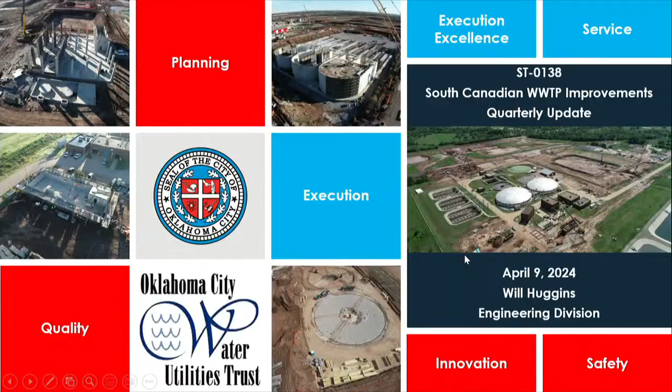Just a reminder, the existing plant is reaching the end of its useful life, so several facilities and treatment processes need to be updated. We're going to increase the treatment capacity from 6 MGD to 8.66 MGD. We're also including enhancements to the treatment so it can comply with new regulatory requirements regarding the effluent, and to optimize the plant to current standards.

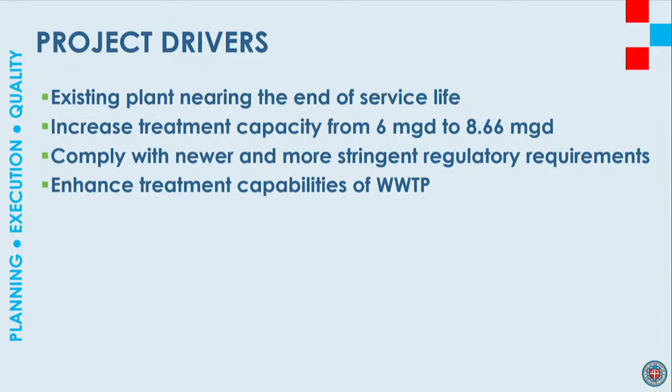Just a little background, I think you've seen this slide a couple times. The engineer is CP&Y, doing business as STV. The contractor is Crossland Heavy Contractors. Construction costs after the value engineering are around a little over $191 million.

It's a big number to get out, so it's a 54-month project, which is long. At about the 42-month mark, we should actually come on to a lot of the new treatment processes being online, the new plant, the new effluent. Then there's about a 12-month period where we're going to be demoing the old plant and restoring the site.

Right now we're tracking pretty well as of April 1st. We're about 33% spent in terms of dollars and around 37% in terms of time complete, so tracking well in terms of getting work done.

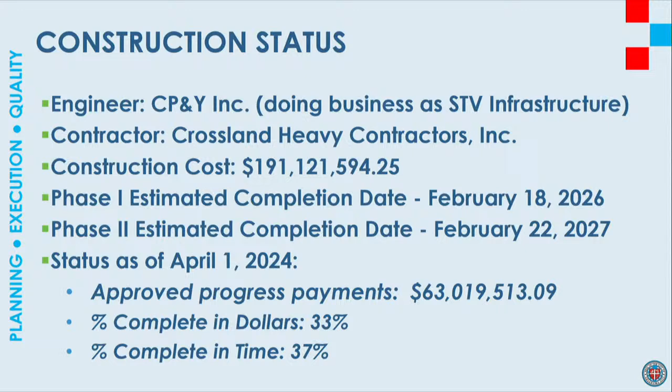Just a quick brief bullet point looking behind the last 90 days: we made a lot of headway on the aeration basin structure, a large concrete structure. I'll show you some pictures on that progress later on.

We've also started the final segment of the 54-inch effluent pipe, including installing a new headwall out in the river. We started pouring base slabs for the clarifiers, and there are several new structures that we'll give you an update on at the next quarterly meeting.

Looking ahead, we're projecting to complete the actual concrete structure for the aeration basin. We plan to do the roofing for the admin building and continue the rough-in and interior finishing. We're going to complete the outfall headwall and effluent pipe, and also do the main slabs and walls of the clarifiers.

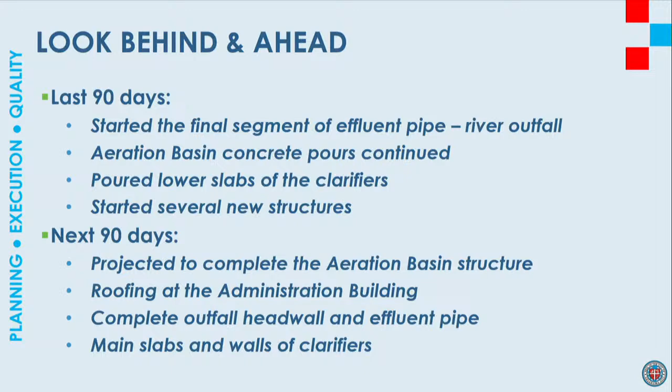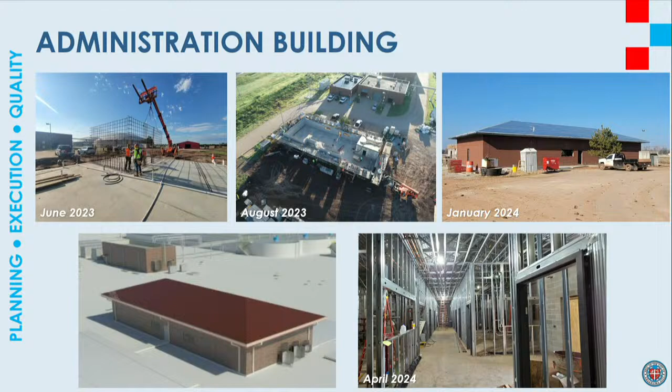With that, I'll show some pictures and try to do it in a timeline format so you can see how the project's progressed. This shows the evolution of the admin building, which will house the offices for staff, where they can meet and train, and the general controls of the actual plant. This is a headworks structure, a new influent headworks, and this just shows it progressing from August to April.

This right here is the actual influent channel. There'll be two bar screen mechanisms located here, one here, and then this is the effluent. As we progress, you'll start to see equipment being added to these pictures.

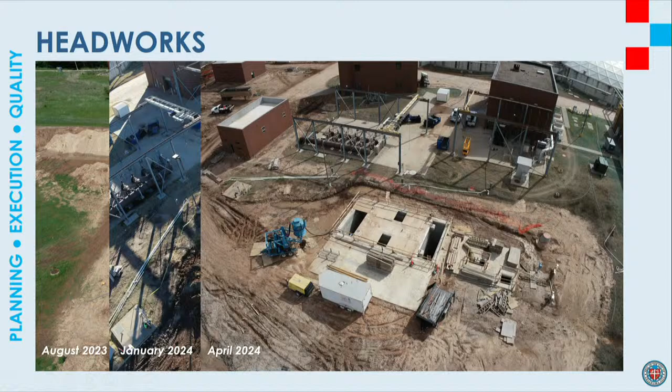Aeration basin - this one's kind of neat, you can see it's a rather large structure. If you have a chance to visit during construction, I'm happy to give you a tour. It's kind of dirty right now, but the next slide is really cool.

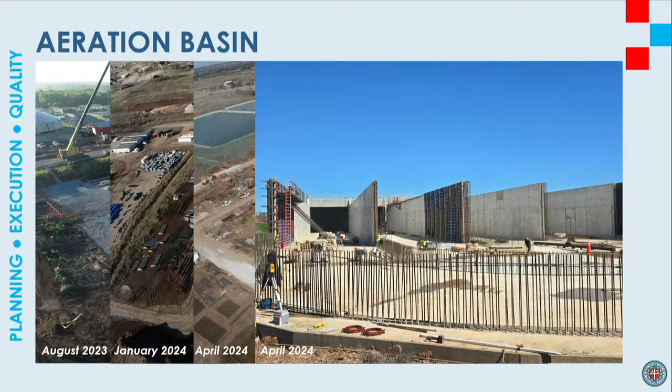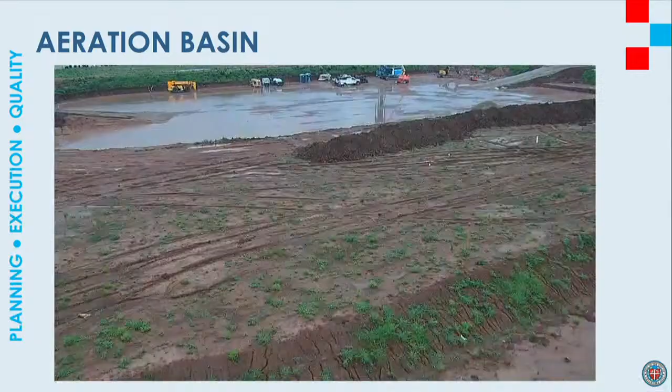Starting about now, you'll see concrete pours coming in - the floors, and they're bringing up the walls, working along. Now they've started to pour some of the decks from this end down here, starting on the upper decks, and they'll finish up the structure over the next 90 days.

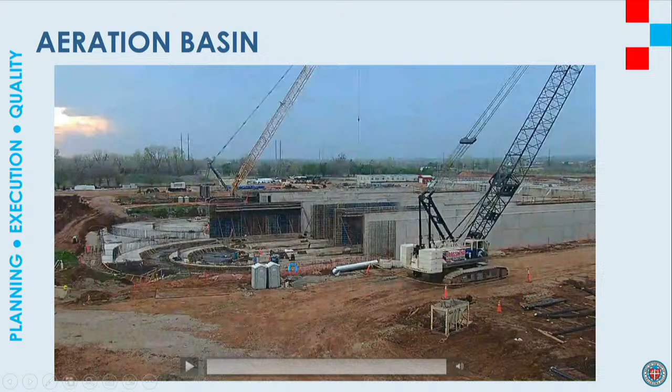Clarifiers, another treatment process. They've done the subsurface improvements, and now they're actually pouring the foundation, and they'll be coming up with the walls.

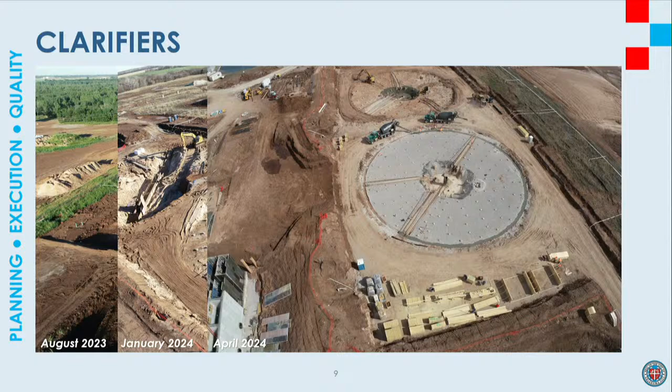Primary electrical building - it'll kind of be the electrical heart of the plant. It's a new primary electrical feed, new primary electrical distribution system, and there'll also be generators located there. They've got the building in place.

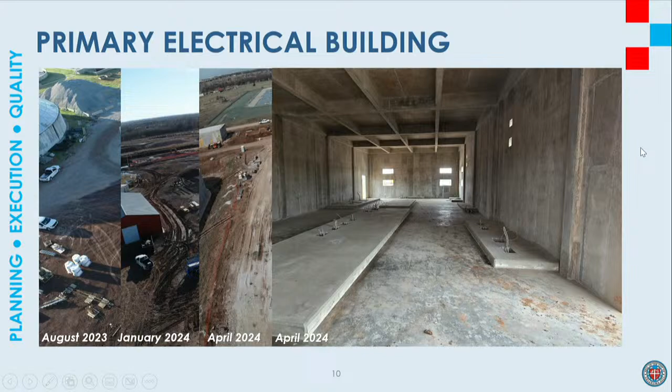Whenever the electrical gear comes in, which is a long lead item, we'll start to see some gear actually come into this building. Disinfection building - this is actually the on-site sodium hypochlorite generation system. As we've talked about before, we're moving away from on-site chlorine gas to on-site generation - a fancy way of saying bleach. So this is just that building coming up out of the ground. You can see we've got some of the chemical tanks already installed and ready.

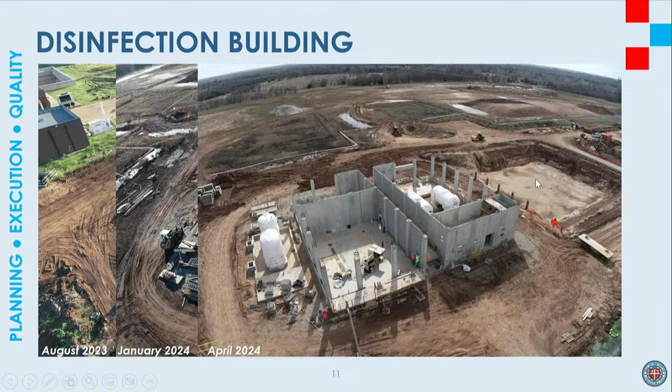Digester thickener - this facility is used for part of solids handling. We've had the masonry completed, and they'll start working on the inside as soon as process equipment starts showing up.

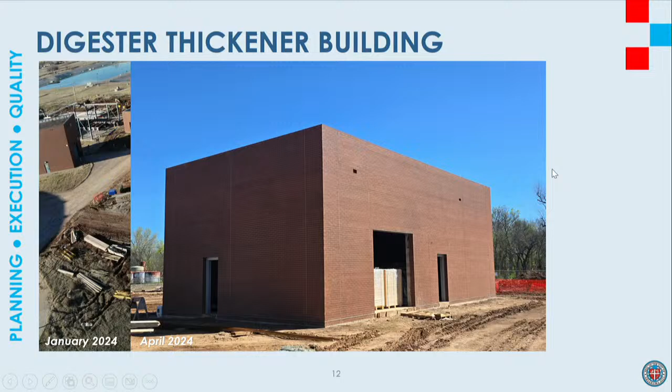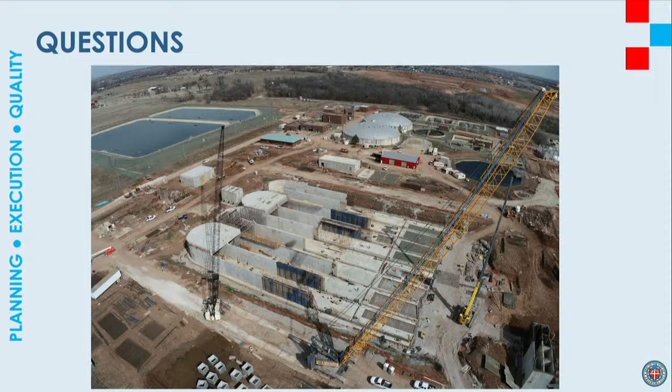And with that, any questions you might have about progress? Anyone have any questions? Thank you very much.

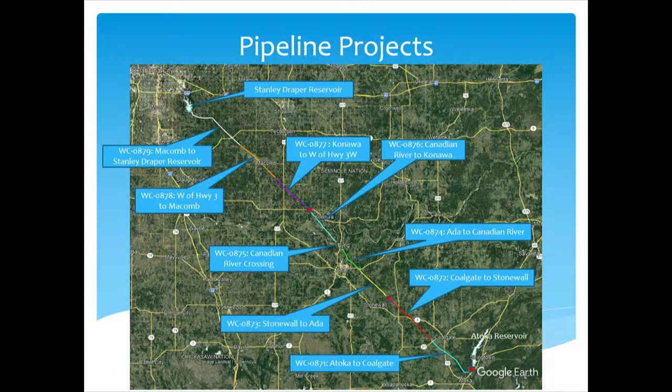Some of these things you've seen before. This is the Atoka program in a nutshell. We've got several projects lined up that we're trying to get done to bring more water from southeast Oklahoma to the city. We still have about 43 miles of pipe currently under construction out of 98.6 miles.

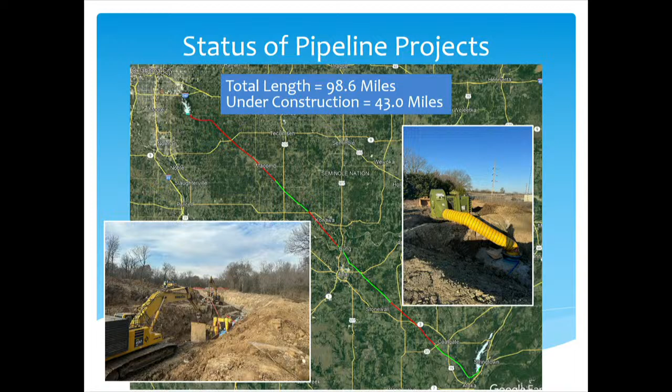Going to the status of each of the projects coming from the southeast to the northwest: the section between Pump Station O and the Coalgate Pump Station - I have 61% of that project installed so far.

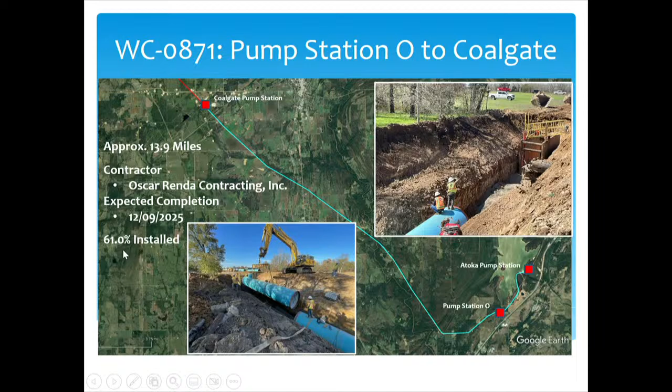Moving on to WC 873, between Stonewall and the Ada Pump Station, we now have 24% installed, and they're just going like crazy.

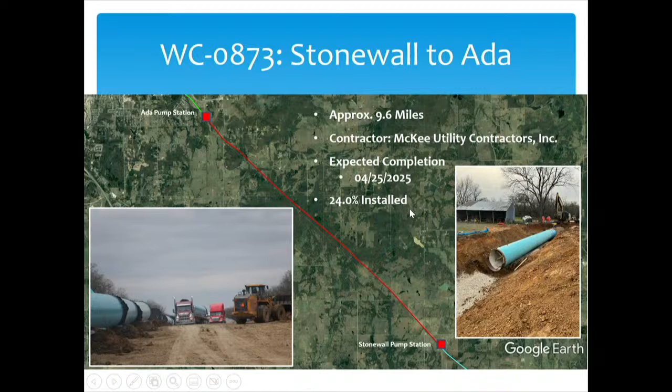WC 874, the segment between Ada and the Canadian River crossing, is pretty much 99% installed - the pipe. They're getting ready to do the connection between the river crossing and their project right here.

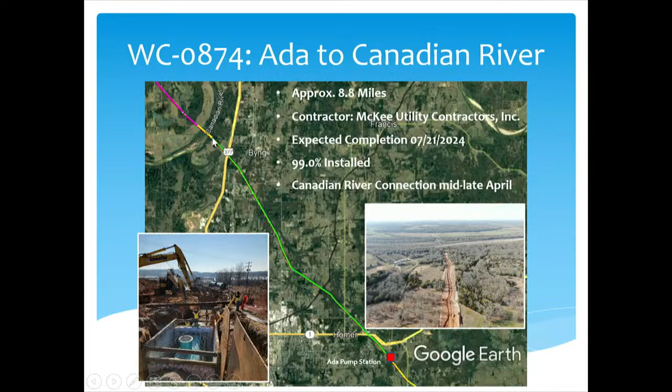Speaking of the river crossing, this project is pretty much 100% installed. McKee Contracting, who is doing the project I previously spoke of, will be doing the interconnection between the new pipelines that Vadnais has installed, and we're gearing up for this to happen on April 22nd.

After that's done, we can turn off the aerial crossing going across the river and resume service in the original Atoka pipeline shortly thereafter.

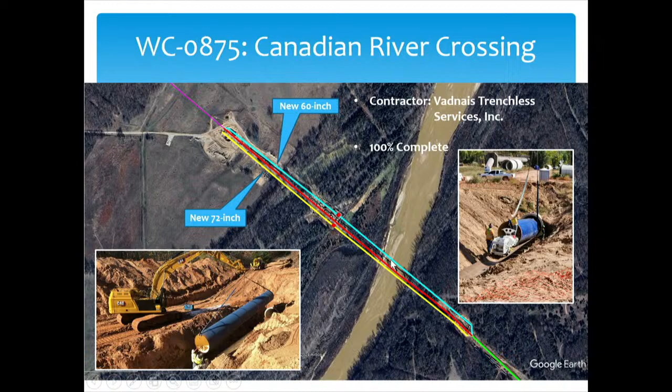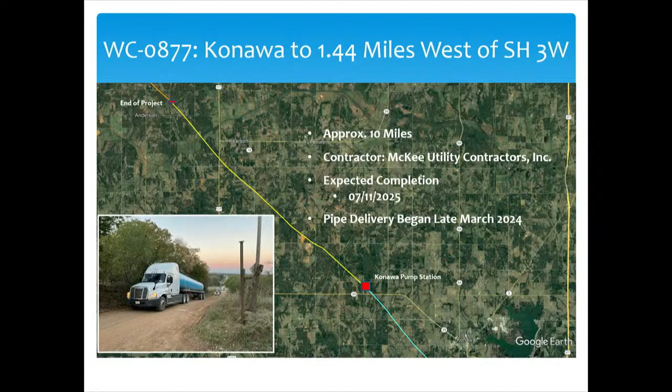877, the project between the Konawa Pump Station and about halfway to Macomb - pipe delivery began late in March of this year, so soon they will begin construction, pretty much right after they get done with the connection at the river crossing. It's the same contractor.

Other upcoming projects would be Pump Station O, which would be the main pump station to start bringing water through the new pipeline, as well as the Coalgate to Stonewall stretch and from the river crossing to the Konawa Pump Station.

And we'll take any questions you may have. Any questions, anyone? Looks like we were making progress. We're moving right along. Yeah, thank you very much. You're welcome. Thank you, Larry.